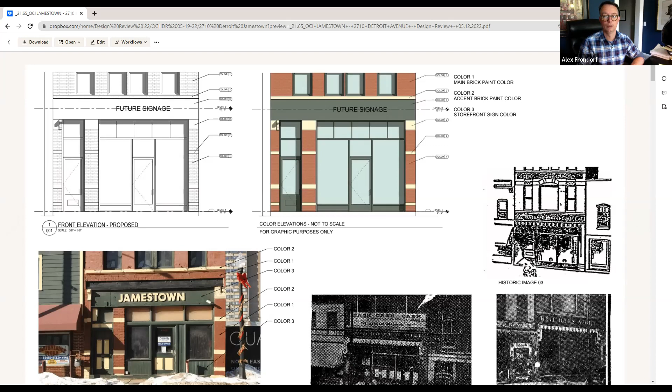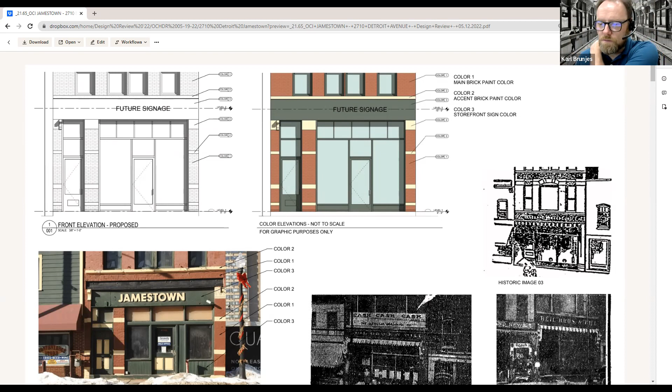Anna or Karl, do I need to recuse myself because I'm working with LDA on another project, or is that not necessary? I don't have any connection to this project. I think just stating that is probably enough, right Karl? I've had commission members recuse themselves because they're working on other projects, but I don't think you have a financial interest in this property. I have no financial interest in this property. Yeah, so I think we should be okay. Okay, thanks.

I'll just state for the record that I'm working with LDA on a separate project. Thank you, Marika. I believe we have Steve Jennings online to represent this project, the Jamestown building here.

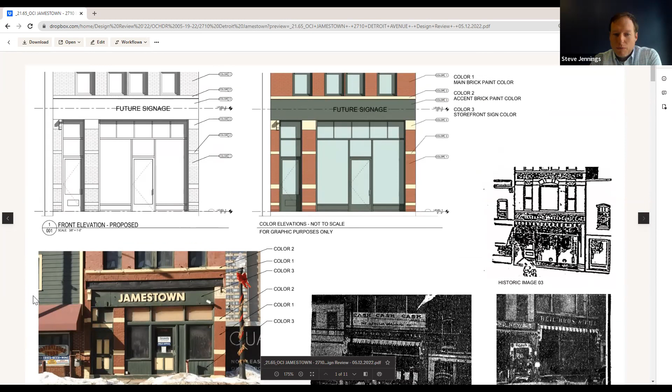Hi everyone. Hi Steve. If you'd like to go to the next slide, just let me know and I can scroll for you. This is a pretty simple project, the other slides are really just more informative. This really tells most of the story. So there's the existing building on Detroit, now labeled the Jamestown building. We don't think that's really a historic name, but that's what people in the neighborhood refer to it as. We're proposing to do the storefront renovation program on the first floor.

And then just the general exterior of the building, mostly painting the exterior, with a few areas of windows. On the very back side, we'll see walls missing.

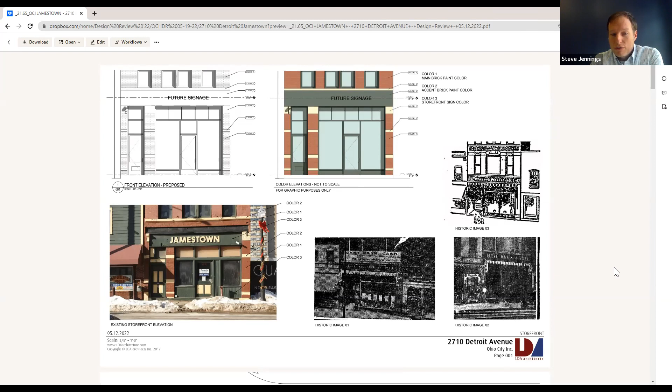On the storefront, you can see our proposed storefront, the existing conditions on the bottom left, and some historic images as well. So what we've tried to do is reference those historic images and bring back the sign band. If you notice, it was a little bit higher on the elevation than the current condition. Where it says Jamestown now is below a structural beam. Originally in those old images that was glass, and the sign was in front of the structural beam and a few courses of brick there. So that's one big move.

The one difference is that over time they added the door on the left to access the apartments and upper floors. That does not occur in the historic photos, but we would maintain a separate entrance for it - there's an office on the second floor and apartments on the third and fourth floor. Then a storefront door in the middle on the right side.

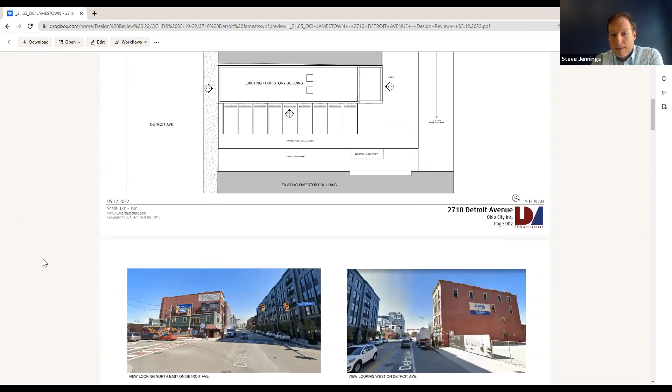I guess we can go through so you get the whole picture. Now the site plan - really we're not doing anything to the site other than on the rear of the building. As I mentioned, we're replacing the rear wall and making that a patio space on that part of the parcel. Next slide.

These are just images from the street. Continue. There's some of the top left that had that wall that was missing. Yeah, scroll up just a little bit.

Yeah, right there is a good spot. So you can see on the top left photo that at some point the whole back wall was removed. I think that was probably during construction of the quarter project. So part of what we're replacing is that back wall.

On the middle image, we will be painting the whole building so that previous Getco sign there will go away.

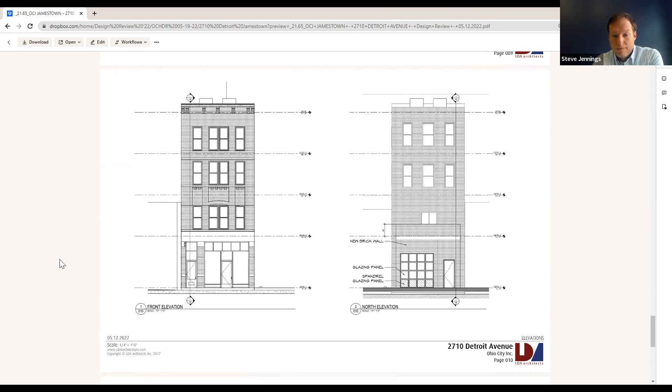Steve, the alignment of the signage on the front, it looked like it was aligned over kind of the storefront glass itself. Can you talk about that? To me, it looks, I don't know what other folks think, like it should be centered across the whole building, centered under that center bay of windows, but I don't know if other folks feel differently on that.

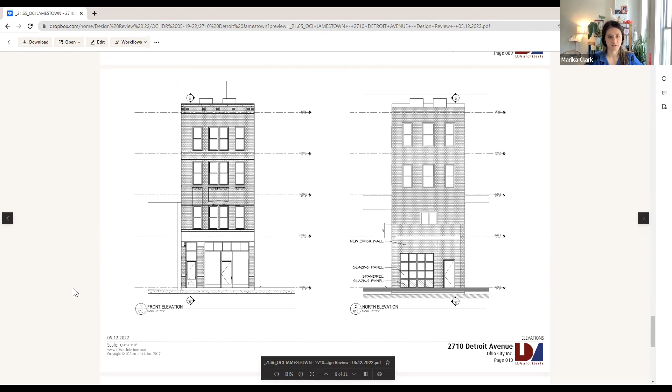I guess I could see it going either way. I think on the first slide, or the early slides, it shows it well. I'm not sure, Donna, if that had the updated slide I sent you for the first image. But this isn't your updated slide. Let me make sure I have the right one.

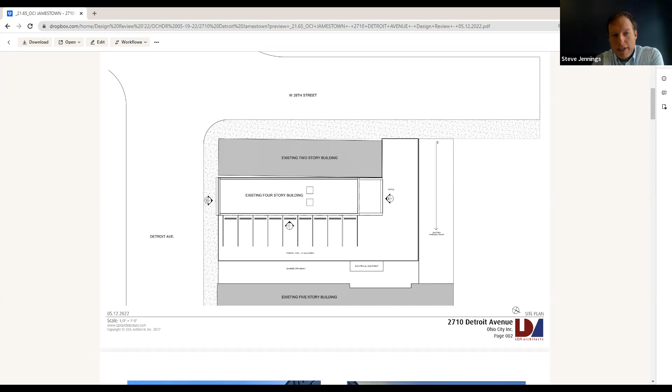So this is not the most updated presentation? This morning I just sent the very first page. It just had some color. Can you see it? I have it pulled up. Okay, hold on, give me 1 second. Okay, yeah, right.

Quick note for everyone, this is both a historic tax credit project as well as the storefront renovation project. So Steve has been incorporating some feedback both from SHPO as well as storefront. This gives the most up-to-date view of colors, etc., and the storefront dimensions we've been working on with SHPO.

Correct, so this has been updated to incorporate the specific colors we talked to the storefront renovation program about. And for the state of Ohio tax credit, they also requested that the storefront have 2 equal panes of glass on either side of the door, rather than being off center.

The signage, I don't know that anybody made a specific comment on that. I think, Marika, we just thought about it kind of like you did, as far as it could go either way. If it's in the middle, it kind of implies it's a sign for the whole building. Since that door on the left is for the upper floors, we decided to go with over the storefront for that signage.

Yeah, I was assuming that was signage for the whole building, but I guess that's accurate. If it's no longer going to be referred to as Jamestown, that's just a business, so this would be specific to the tenant, a future tenant. Well, and the intent would be that once there was a tenant, you'd come back for review of the signage, correct? Correct.

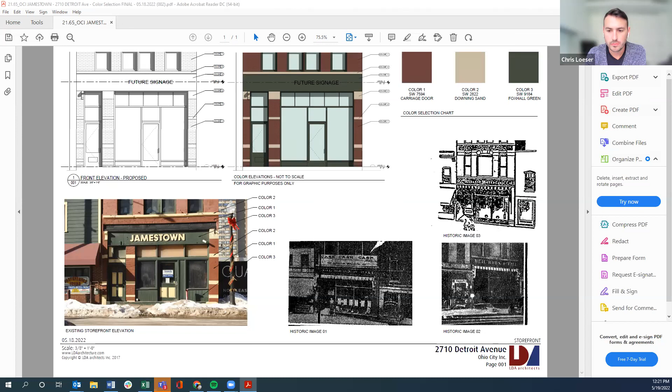Has there been any lighting considered? It doesn't look like there's any building lighting currently, but is there an intent to add exterior facade lighting? No, I don't think we've talked about that. There's pretty adequate street lighting there. You'd probably have some exterior lit signage coming back as part of the signage package, but I don't think we're going to do any exterior lighting on the building. There's pretty adequate street light there.

Can you talk a little bit about the divided lights in the transom? It's hard to see in the historic photo, but it looks like there are more proposed in this new renovation than may have been there originally. It's hard to see from the quality of these images, but working with SHPO, this was our best guess — there's kind of that one horizontal line, and above that, the one in the bottom right corner maybe has, you can almost see, some vertical lines. Our interpretation was that there were some smaller lights above the larger storefront glass. It's just really hard to see in the photos, they're very grainy.

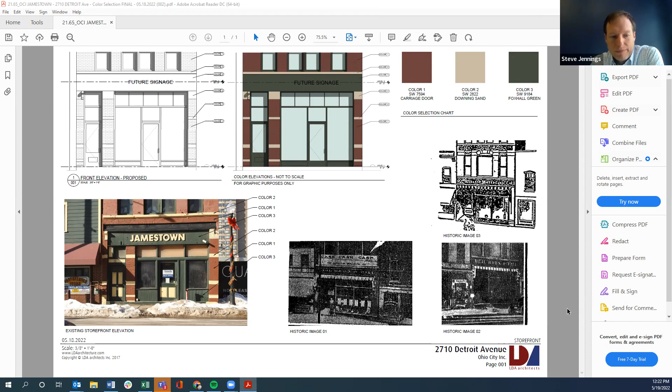It looks like there's also a curb line at the base. Is that getting taken out? I don't see it in the drawings still, and I assume for ADA as you do renovations that doesn't work. Oh yeah, so there's not a step at the... well, there is currently a step. Yeah, so that would remain. In that colored elevation it's shown white, there's a very light line that's probably the sidewalk line. Oh okay, I didn't see that. So there will still be a step there. Correct. And there's actually a vault underneath that extends out into the sidewalk, so changing that would be a major undertaking because it's all kind of integrated there.

My only other question is, similarly to the other presentation, any plan for plantings or green space along the parking lot side? I see this lot every day, and it is really stark feeling in that gap between this building and the corridor. I'm assuming nothing else is happening there on the corridor side, so I feel like if there's any opportunity for trees or anything in this gap, this is it.

I'd agree, Marika, absolutely. We don't have a plan for that now, but we will be working with the Snablys. There's that blank space between the two projects owned by both of us, and we actually bought the building. We still have some easement issues to deal with that we're working through since we're friendly. They need easements to access the parking there. I would like to, if we can, gate that entire area off so there's not a curb cut on Detroit. There would probably have to be a movable fence because I think the power company's transformers are in that gap between the buildings, which is why they basically bought this building, and then we bought it from them.

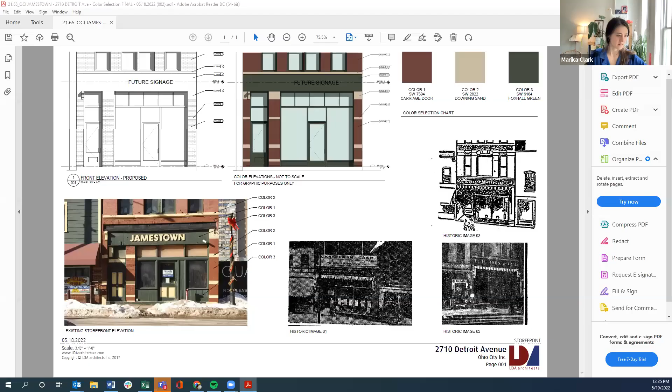Okay, got it. I wasn't totally clear on whether that back side on the site plan where it says patio was actually meant to be vehicular access or not, but it sounds like not. I don't think it probably will end up that way. Right now we have the existing curb cut off Detroit, but I'd rather not use it as long as we can figure out the easement issues around the site.

So would the idea be to use the corridor's existing curb cut or another one next to it? There's actually one behind the building that comes off 28th. If you can scroll back up to the site plan, Donna. Yeah, so off of 28th Street there is an existing curb cut. I remember that, but is it separate from the one that goes into the corridor? Yeah, it's separate there too.

I just would love to see anything that you could do, working with Pete on this, to try to make that space, especially on Detroit Avenue, feel a little bit more hospitable to the street presence.

I completely agree with you, obviously. Part of it's just that access they need to maintain for those transformers, but I'm hoping we can work it out from the rear. And then the parking probably will only be open to the upstairs tenants, not the retail tenants anyway, so that'll be very little used. So I feel like we could maintain the access pretty reasonably without accessing off Detroit, I would hope.

Got it. Is there any plan or thought on what will go in the ground floor here? So we have kind of a pop-up tenant that signed a lease for us, but they're still in permitting with the city. It's going to be a retail user of some sort. It's actually Toast.